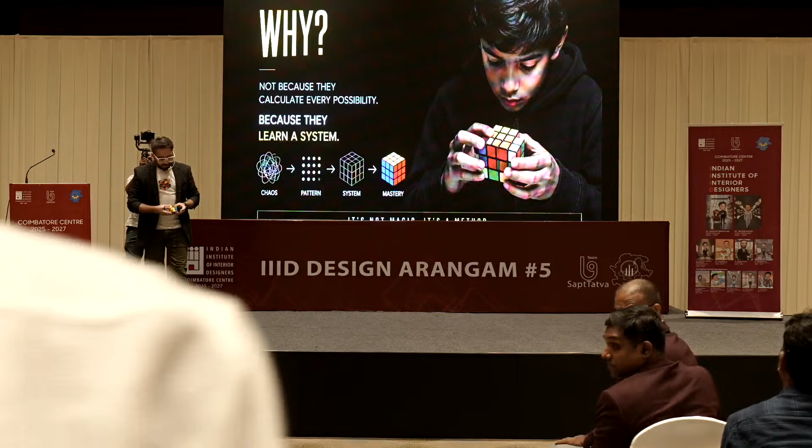Yeah, but a lot of people can solve it, as I mentioned. Even a lot of kids can solve it. I'm surprised actually no one here knows how to solve this and can teach me. But a lot of kids can also solve it because it is a system.

It is a step-by-step process that leads to a solution. So basically it's nothing but problem solving. This is one kind of problem solving that we're talking about over here.

Sorry, I'm just going to have a little trouble finding the right signal for getting my slides in place. But yeah, I think I've got to remain closer to the system over here.

A problem, like I mentioned, is not chaos, it's unsolved logic. Every complex system has an algorithm inside it, and I want to talk you through this using this prop I have over here. Currently I don't know how to solve it, but I use it as a tool for fidgeting. Whenever I'm nervous, whenever I'm anxious, whenever I need to calm myself, my hands keep on doing this. That's pretty much what I do right now.

What I try to do is actually look into how you can solve the algorithm. If you just Google it, it says it's widely perceived as difficult, but it is actually a matter of memorization and logic. That definition got me very intrigued — that if every problem can be solved by following a sequence, or by logic, or by memorization, then it's something every human should be able to do. But yet we are not able to do that.

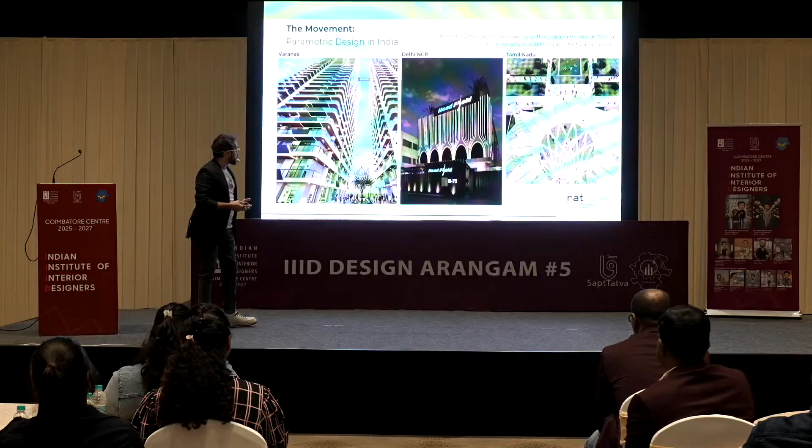We're doing facades, we're doing sports projects, we're doing religious projects in sacred spaces. We're doing some high-rise skyscrapers. So these are a few projects in Tamil Nadu, Delhi, and Varanasi, which are all very different and unique in itself.

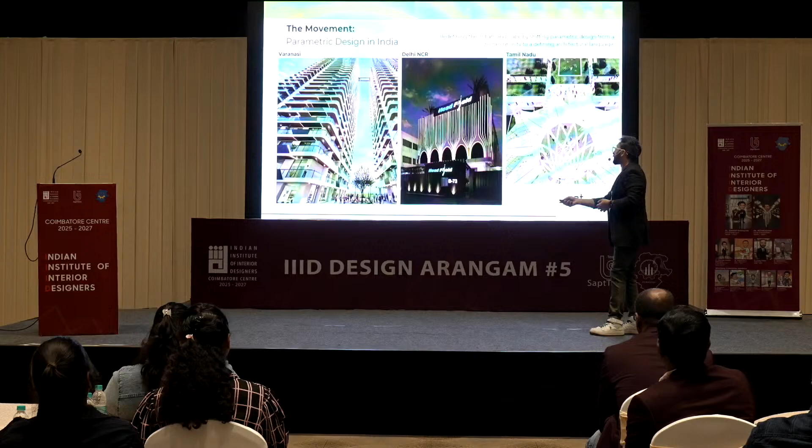And everything has some sort of an algorithm behind it in some way or the other, which is what we're trying to be using. But how it all started for me as a journey was I was born in Delhi, moved to London for my master's at the Architectural Association. After that, I moved to Los Angeles and made my way back to India.

My partner, Pradeep, who co-founded RatLab with me, is from Bangalore and he moved to London. Again, we met there during our masters. Later on, he went to Shanghai to pursue his robotics, which is what he's doing. Moved to Germany and then London as well. So we've had a fair bit of a global understanding and experience and exposure over the years, which has really taught us a lot of things.

So I studied at the Architectural Association London, a prestigious architectural school, which exposes you to a lot of things about technology, about design, about architecture, how to solve problems. Not a very easy place to survive in, but nonetheless, I did survive.

And after that, I went on to work in a robotics company, which used to build facades using robotic arms. It was called RoboFold. And then I started to work at Zaha Hadid Architects, which was one of the game-changing and life-changing experiences for me, I would say, because that's pretty much where I understood where I have always wanted to be and where I was belonging at that time. And ZHA had a huge influence on me.

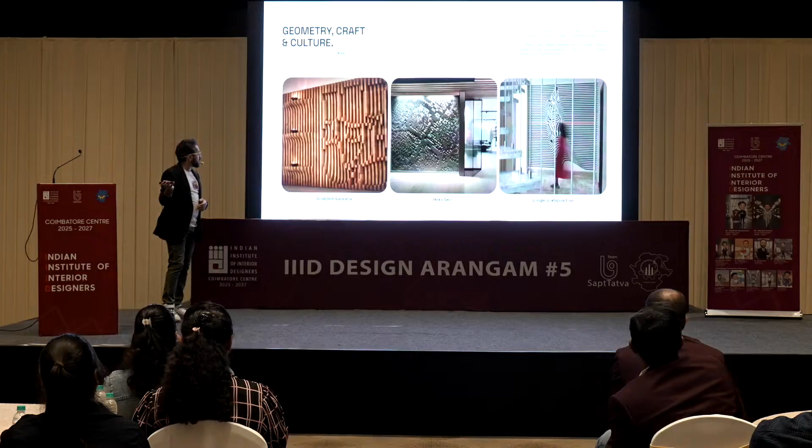We've also done a few different wall art features of different kinds in different spaces, and now coming up with a gallery as well.

These are a plethora of different unique installations. There are drape-like installations, and a couple of chandeliers.

We worked for the Kohler Experience Center in Hyderabad, making a full parametric wall art for them using sculpted wood. We've also done a lot of furniture pieces, a couple of things in Chandigarh with this Corbusier hand kind of thing.

That brings me to the next chapter, facades, which is one of our main areas of expertise. Moving to a larger scale beyond art - design isn't what you draw, it's what you debug.

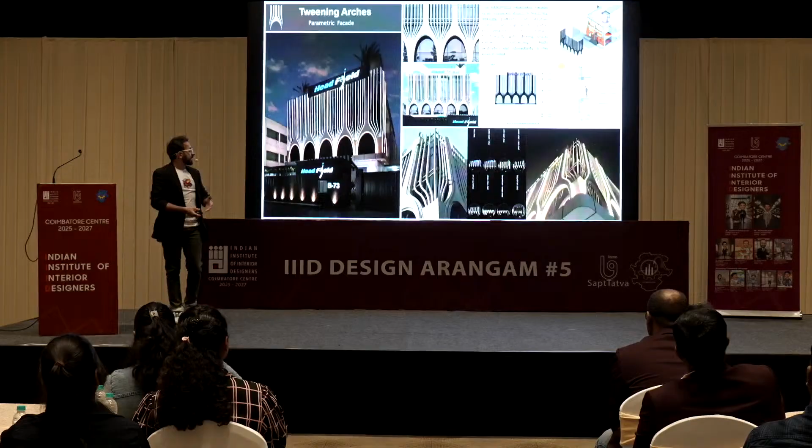When we design facades, we're mostly trying to solve a problem. What kind of problem does a facade face? Basically a facade is an interface between the interior and the outside, so it has to tackle the environmental dynamics you see here.

Before we start designing something, we actually look into the radiation and the daylight values inside on the floor plates. That's where the design starts. And when we start designing, it usually begins from a sketch.

I always have to mention this, because knowing that we come from a world of technology, one might think the computer helps design all of this. The computer only helps - you are the designer who designs all of these things.

This is a recent residential project which we designed and built somewhere close to Delhi.

This is another residence which is under progress right now. Mostly whenever we do residential projects, we try to add a bit of uniqueness in the facade without really affecting the architecture of it.

This is another such example. This was an office space that we designed and built.

This is the Kohler Experience Center, a huge 60 feet by 25 feet wall made entirely in sculpted wood. Every single piece of the back wall had a numbering system and a sequence which had to be put in place like a jigsaw puzzle to create this entire wave-like form.

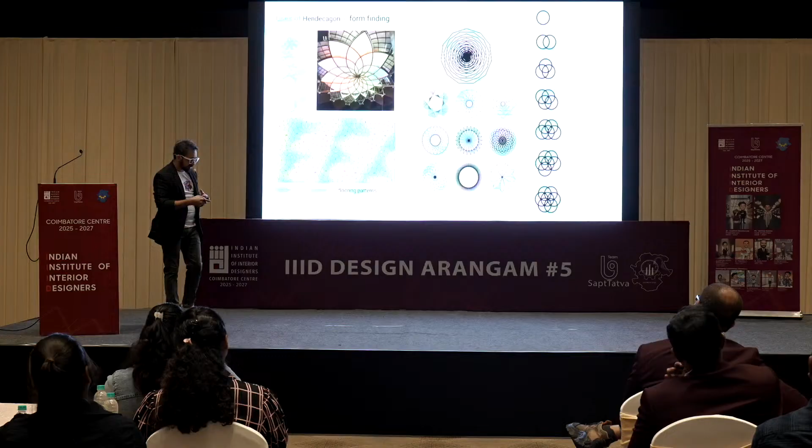You can see that everything is around 11 sides here. There was a big constraint the client came with, that he wanted to use the number 11, apart from other Vastu and numerology principles. We started to integrate and understand what all we can do with number 11, so we ended up working with a geometry called hendecagon - an 11-sided polygon.

We started to create forms, mathematical formations, what all we can manage through a hendecagon. We ended up designing an algorithm which could help us design all of these forms, and then we later structurally started to optimize these forms - what works best for us, what does not.

And all of that became a revelation into something like this, which had an oculus at top, and 11 sides, 11 columns going up to make this entire structure, where the deity is right at the intersection of the 11 sides that are coming in and converging.

And to infuse technologies, we also built an augmented reality tool at that time - this is back in 2018 or 19. At that time, the technology was not very popular, but we were able to make this to actually create the experience while explaining this to the client as well. These kinds of tools and interventions become very important - so when we're designing something, how we present it, how we visualize it. We try to use tech in different spheres of our work.

This is a recent project of ours which we are doing in Delhi - it's for ISKCON Temple. ISKCON temples, as most of you would know, are located in different parts of the world. So we are reinterpreting Krishna's story and narrative through this temple project.

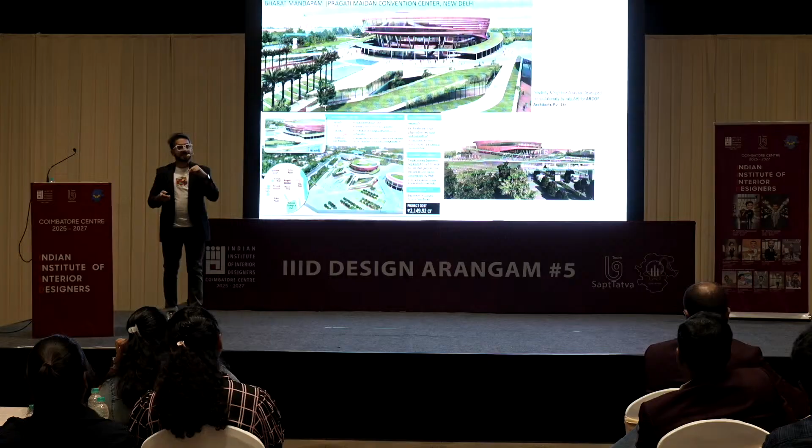So how did we do that? We actually created an algorithm that would place a human being on every single seat. Let me explain the algorithm before I show you the video. I want to analyze which seat is the best amongst the 10,000 seats. So I'll place a human being there, throw certain visibility rays onto the screen. If the visibility rays clash with a person sitting in front or diagonally in front, it's a cross. If it passes through to the stage, it's a tick. Simple logic, but imagine throwing 100 rays from 10,000 seats.

So you're talking about a million rays being computed in real time, and at the same time telling you which seat has the maximum percentage of rays hitting the screen. So how do you analyze that? We actually built an algorithm.

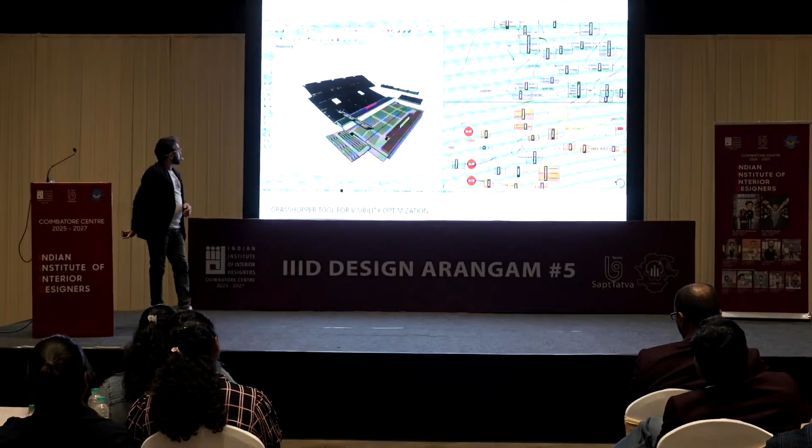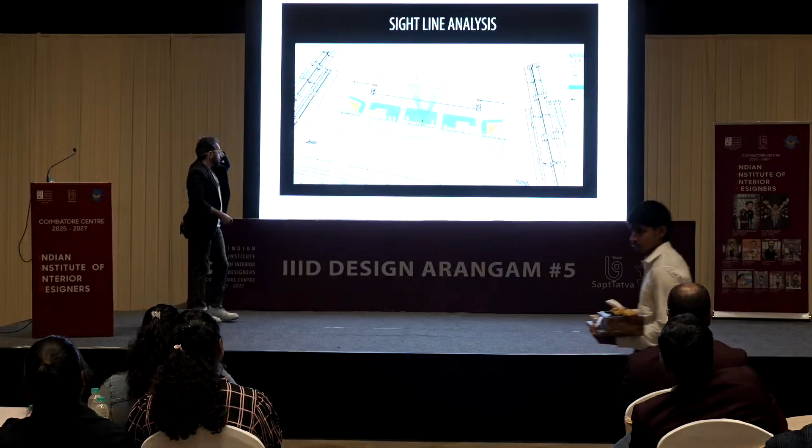We used the tool Grasshopper to make the entire 3D model where every single seat was designed and made. This is what the algorithm running looks like in real time, just fast forwarded a bit. Every single person is being seated on the seat.

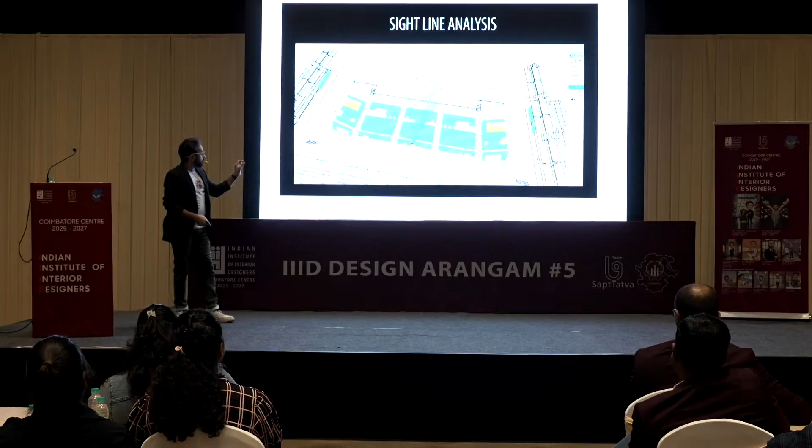You're getting a value and also a color - green, yellow, orange, or red - depending on if it's a bad seat, and every single seat is being analyzed, eventually leading to a scoring. There's a scoring matrix where we evaluated the entire seats of the stadium: black seats are the worst, red seats are bad, orange is decent, yellow has some problems, but green are the best. It's not like only the front seats are going to be the best - there are front seats which are orange and yellow as well, because of the angle or diagonally clashing rays.

Now, when we built this algorithm, it allowed us to deploy it in different projects. We actually used it in Yashobhoomi in Dwarka as well, where we were also involved to do a similar analysis. At the end, it exports all the data into an Excel sheet. This project was done back in

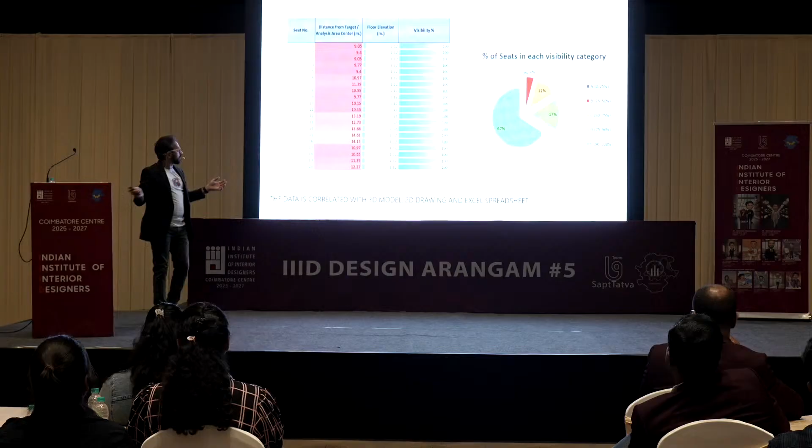2020, I think 2021 - this is pre-AI era. Let me clarify, that's what I want to tell you - there's no AI involved in any of this. This is all manually written algorithms computed onto a system to calculate all of these things. This is where we think we are able to make systems smarter. So you come up with a problem - every problem can have an algorithmic solution if you're able to focus on the system.

But behind these algorithms, there are processes that are followed. We do have site interactions, we have the sketches. There is a conventional architect and designer working on the site, which is me and my team, where we sketch, ideate, trace, and take it to the site. That conventional process also exists. The reason I want to show you this is that it's not only technology. Technology is only a tool that can help you achieve what you're trying to design.

That brings me to the next chapter, one of the most important ones for the current times, artificial intelligence. Now, how many of you use AI? Give me a show of hands. I was expecting a full show of hands, because AI is something which is forced onto us, which is permeated into our life in different ways where we don't have control. It's there on Instagram, WhatsApp, Facebook, Meta, ChatGPT, and lots of things we're using. AI is everywhere. Somehow AI is also making people look very smart, smarter than they actually are, sometimes.

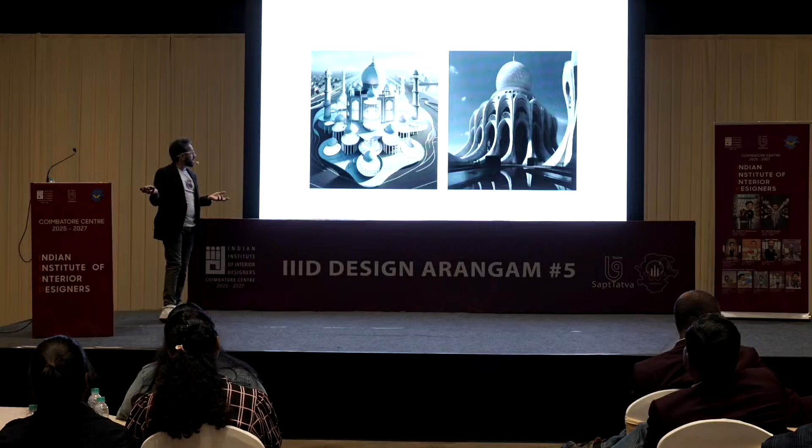Online, there are lots of prompts now available which you can use to create an image, write an email, or whatever you want to do. There are a lot of architecture prompts available. This is like an AI-based Taj Mahal from when AI was not advanced. If you use it now, AI is much more advanced, it will give you much more accurate and realistic Taj Mahal photos. I can just stand like this and place myself in front of the Taj Mahal just by using AI in 5 minutes. So all of that has become possible. It has its own problems as well. But what I want to question is...

If AI can recreate our style, did it outsmart us? That's something we need to think about, because we are not just prompting, but we are provoking AI to do something. And another big question is, are we designing with AI, or are we designing for our own replacement? That is something every designer needs to think about, because yes, AI is there. It is creating better designs, better looking designs, maybe not better performing or better creative, but better looking designs for sure, as of now.

That brings me to the next chapter, smart labs. I mentioned smart labs earlier, but what exactly are we doing in smart labs? Currently we are in the 12th batch of smart labs. We started in 2017 from Coimbatore, like I mentioned earlier. So what we've done over the years is build a team of tutors who, alongside me, teach different technologies of design. I myself teach Grasshopper, there's someone who teaches Rhino, someone who teaches AI, someone who teaches Python at times, someone taking Maya, and there are different softwares.

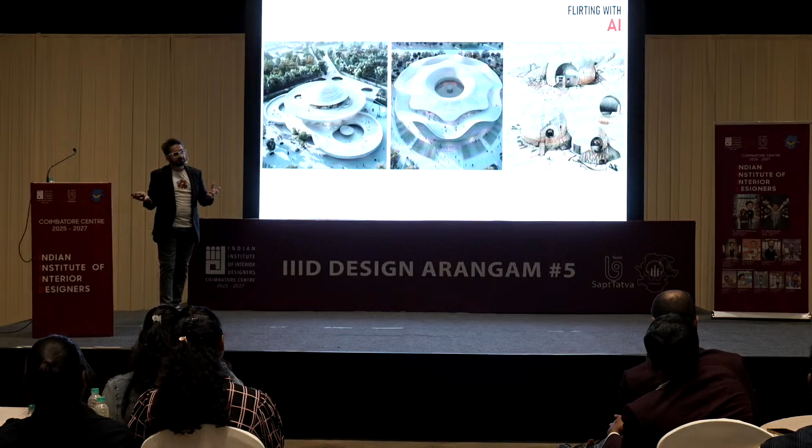So we have had a team of tutors which keep on changing and refreshing over the years. Many of them are located outside of India as well, teaching online, and we have a global cohort of people who, over the years, have been using technology. Very recently, about 2-3 years back, we started to integrate AI into our curriculum.

So our curriculum was mostly about design technology using Grasshopper, Rhino, Maya, etc. Very recently we started to use AI, and this was the result of students who had no exposure to technology, who could leverage AI to use it in the right way to create things like this.

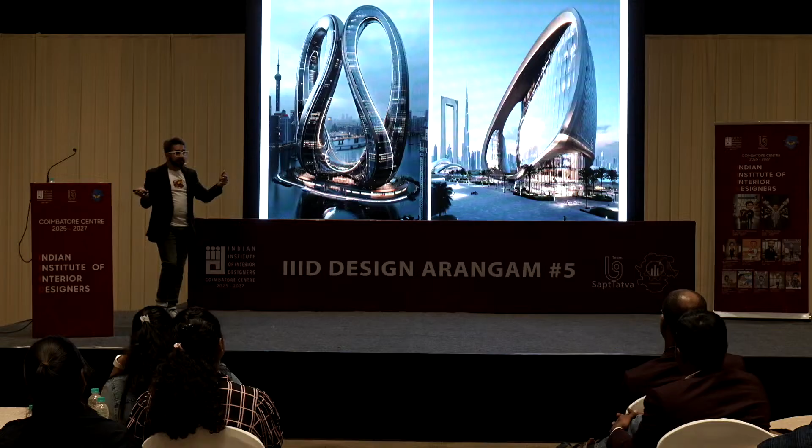This was a sacred space project, a temple being designed by a student. This was a skyscraper in Dubai. I'm just going to quickly brush through these visuals for you to absorb and understand how AI assisted in creating all of these workflows. This was all done by students who were taught AI in a matter of 2 hours, 4 hours, etc., who could end up creating results like this. And that did not replace them. That empowered them to do more using these tools and technologies.

These are all renders, designs, whatever you want to call it, done by AI completely, obviously with human prompting. So what we teach them is how to prompt in the right way, to develop their soft skills and hard skills in AI. It's not only writing an email using ChatGPT, but it's more about creating a design where they are actually understanding the proportions, materiality, and feeding in all of this information to get the desired results.

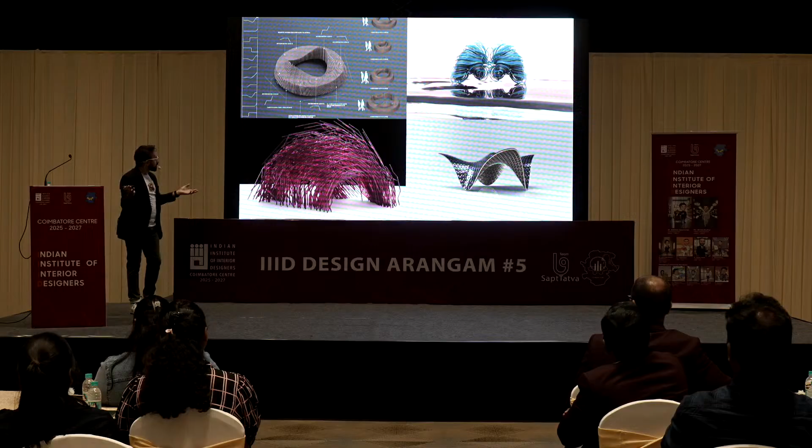And these are all digital fabrication experiments. Some students end up creating apps with interactive design modules, 3D printing, creating buildings and forms. All of these are done by students across the years, from second year, third year, fourth year of architecture typically, and they come with zero idea of technology, but they're empowered with these tools that they can end up creating things like these. That has led to a great revolution for us in its own way.

We've had more than 250 students graduating in the last 11 batches, the 12th batch is going on, the 13th batch is coming soon in September. Every year we try to do one batch of 6 months. It's a hybrid program, and anybody from any part of the world can participate.

Now it's mostly online, with a few physical studios where we teach them about digital fabrication, 3D printing, how to set up your files, how to work with a laser cutter. At the end, they work on a very exciting exhibition, a hands-on exhibition where they put all their work together and present it to the public, to the outer world.

So these are all outputs of that. I'll quickly show you...

Some more works of AI integrated with computational design. What you get out of AI, you end up 3D modeling all of that as well, it's not like you stop right there. So students are encouraged to 3D model using the tools they've learned, Grasshopper, Maya, Rhino, whatever tools, and the design complexity the students achieve through this is commendable as a batch, what we've seen over the years.